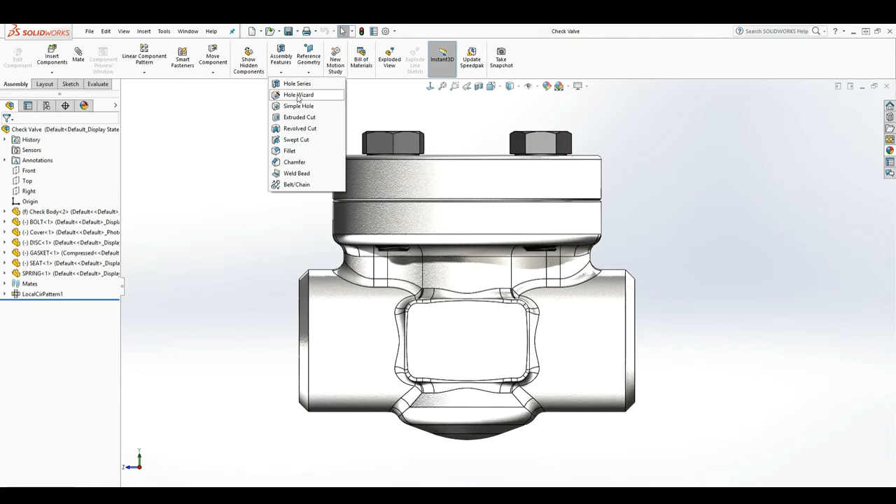Hello, welcome back. So in this lesson we are going to be talking about the assembly features. So if we click on this drop down, we have all these features that can be added in the assembly mode. So what that means is any feature you add in this assembly would only be applied in the assembly mode but not in the part mode.

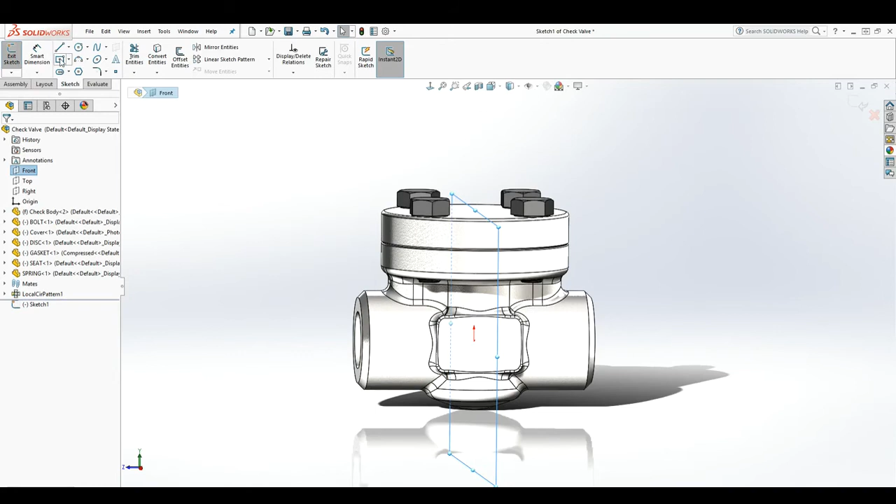So a good example would be, let's say I want to do an extrude cut. So we'll select a plane, let's just say the front plane. And please, anything we do in this lesson, please don't save your work. Anything we do in this lesson is just for example purpose, so don't save anything we do in this lesson. So we'll click on the front plane and sketch. And let's just draw a rectangle on that plane, normal to, something like that, and exit that sketch.

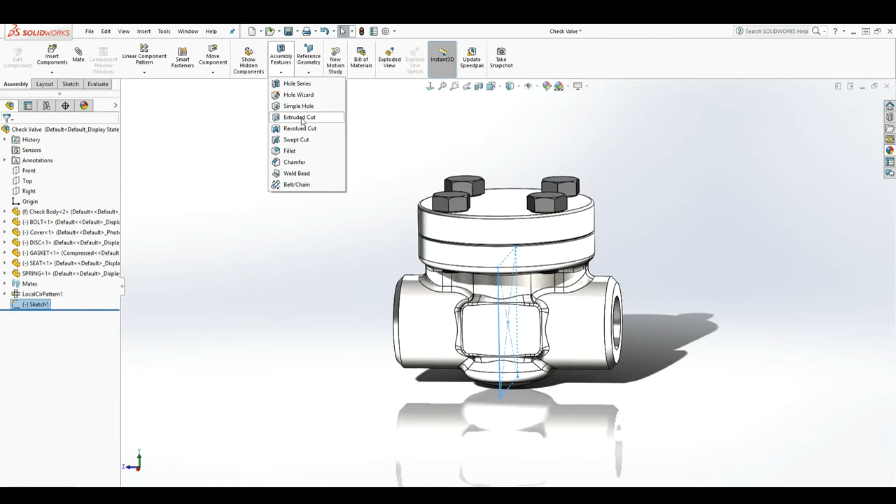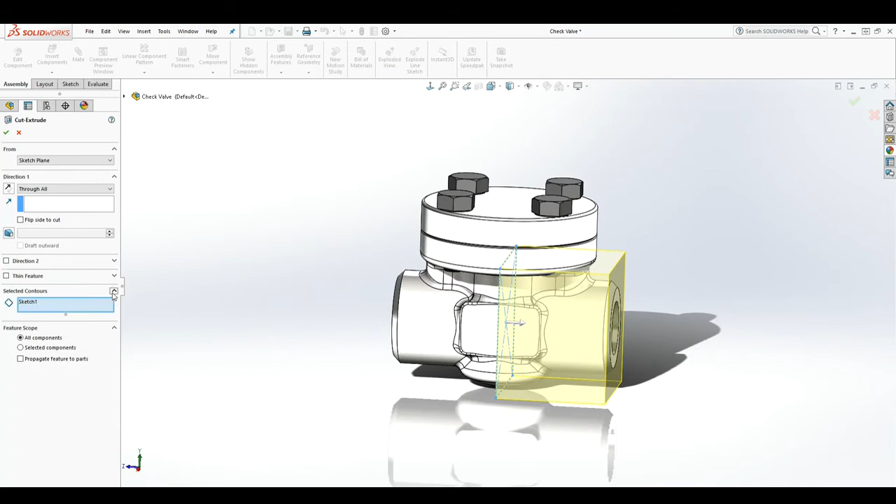And now that we have our sketch, what we want to do is go into our assembly, and under the assembly feature we want to pick an extrude cut. So now we have the extrude cut, and we're just going to do through all, so cutting through that part through all. And now the only thing we have to select is selected component. Pretty much the selected components means the components you select, or you can cut through all components there. So that is what we'll do, and we'll click OK.

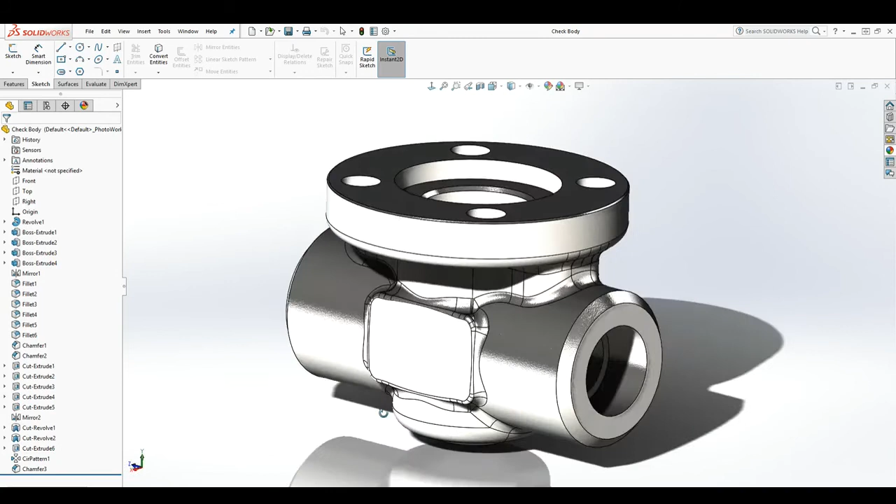And as you can see, that extrude cut is cutting through that component in that assembly. But when I open this part file, I'll right click and open. As you can see, the extrude cut doesn't exist on the part level. It only exists in the assembly. So I'm going to close that.

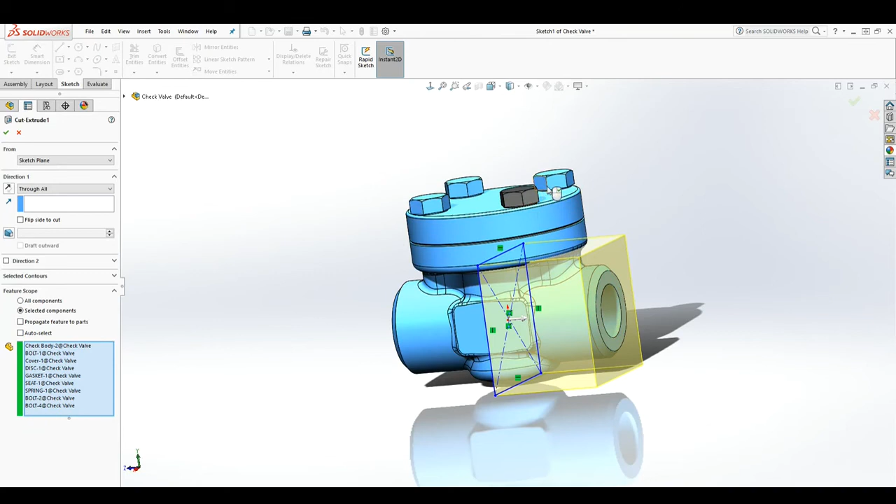And we can right click on this feature and edit it. And now we have the component, all components selected. And if we want to select components, we'll uncheck that auto select. Now if you want this extrude cut to cut through certain parts, you can uncheck the part you want it not to cut through. So any part you uncheck, this extrude cut would not cut through it, but any part you select, the extrude cut will cut through it. And that is how that feature works.

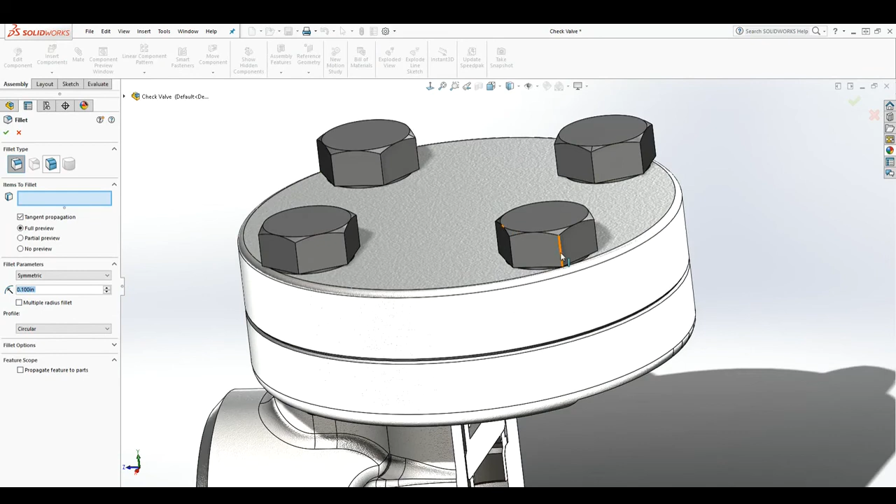And another thing is, let's say if we want to add a fillet, we can add a fillet to this bolt, not on the face, on the edge, something like that. And anything we apply with this feature, like I said, only exists in the assembly. So we'll click OK. So now if I right click and open that part file for that bolt, as you can see, the fillet does not exist on it.

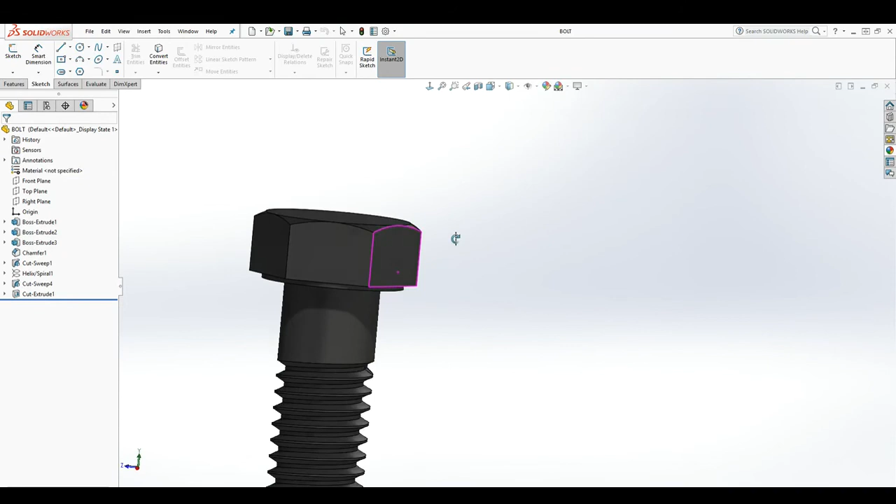So that is pretty much how the assembly feature works. Any assembly feature you use will only be applied on the assembly level, but not on the part level. And that is pretty much it.